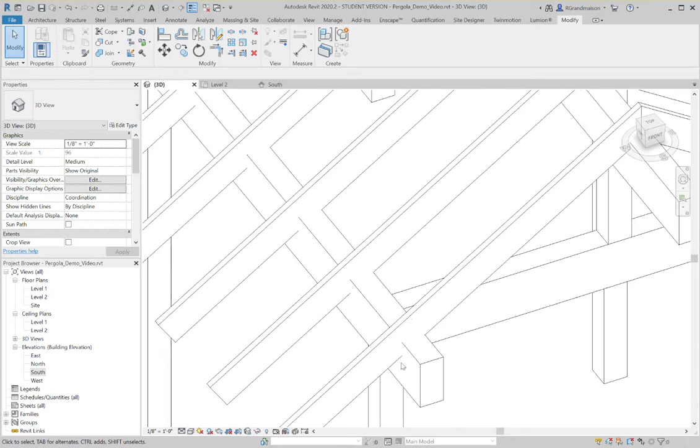So let's take a look first at the bird's mouth that should exist here between this rafter and this beam. The easiest way to accomplish that is to utilize a feature inside of Revit called coping.

Coping is when you cut an unusual shape where beams, in particular steel beams, come together, like an I-beam or a W shape. Often they're sculpted and cut in a very elaborate way, almost to allow the flange on that I-beam to nest into and amongst the webs, or the chords on the top and bottom of the steel beam.

We can use that for wood beams as well, and it's really simple to do. All you have to do is go to your modify panel, and the cope tool is just above the cut tool on the geometry panel.

If you drop this down, you'll also notice there's the ability to remove coping as well. Let me just pause on that.

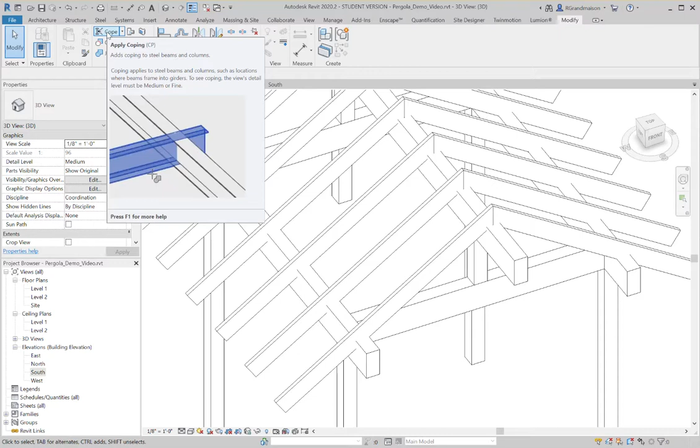Let's see if an image comes up to show you the video for this. Here's a typical situation—you can see what typically happens is you have the ability to take a beam and cope it so it cuts with a certain clearance to the other framing member. Then they could attach welded plates, in the case of steel beams, and bolt or weld them together, whatever it is they have to do.

So in this case, we're going to use the coping tool to cut the bird's mouth in this rafter to this beam, and on this rafter as well to this beam up here.

Really easy to do. All you do is pick the cope tool. You'll notice multiple cut is selected here, so the next thing it's asking me to do is first select the element to be coped—that's the element that's going to be cut.

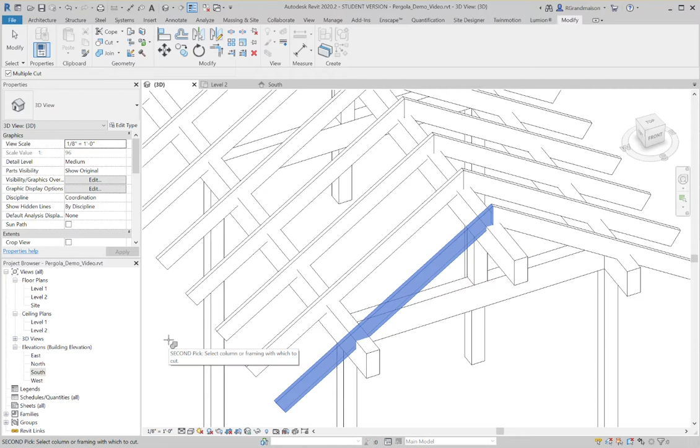I'm going to pick this rafter here, and then it's asking me to select the column or framing with which to cut. I'm going to cut it with this beam here, and now you'll notice it actually cut a bird's mouth out of there.

However, it's the wrong size to really work well for me. Don't worry about that for now—we're going to fix that in a moment.

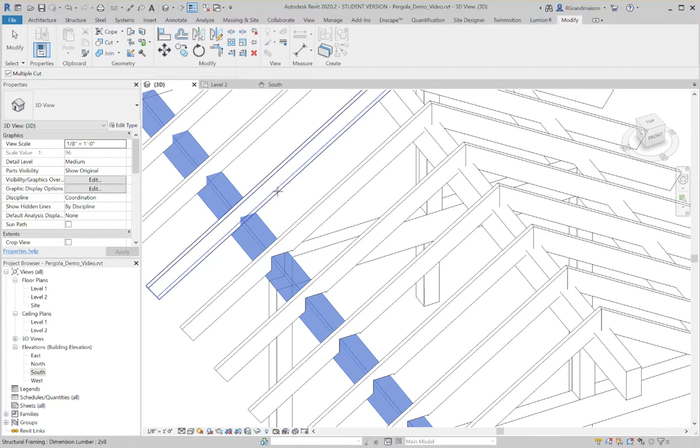So now it's asking me for the next element to be cut. I'm going to pick this one, and this one, and this one, and this one—I'm going to march all the way along here and pick all of these rafters to cut.

All right, that worked out pretty well. I'm going to click out in the middle of nowhere here, and then go back to the tool and pick this beam to cut it.

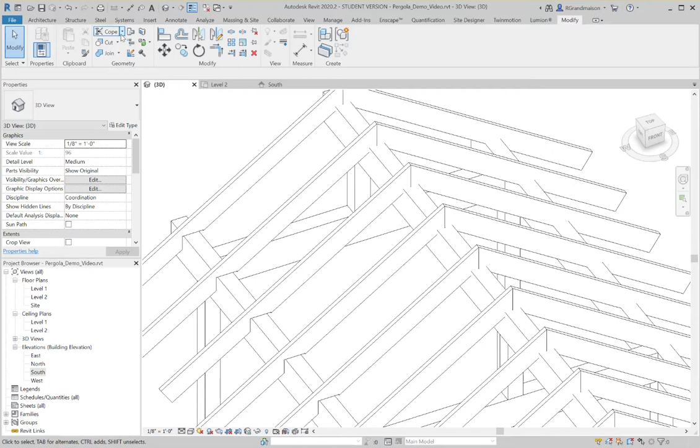Cancel that command and go back to the cope tool. Reselect the cope tool, pick this one, then pick this one to cut it, and then this one, and this one, and this one, and this one, and this one, and this one.

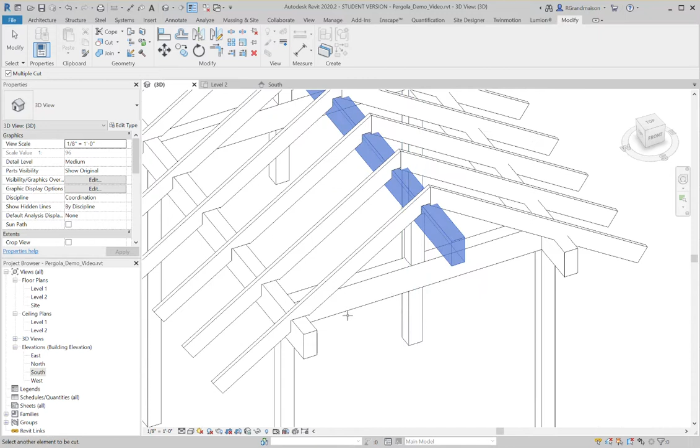So now you can see I have a strange looking bird's mouth at the top and at the bottom of this rafter for the coping.

I could do the same thing on the other side, so let's go ahead and reselect the cope tool. I'll pick the front one here, then pick this one to cope it, and just march along here very quickly picking each one. Doesn't take very long.

Restart the cope tool, pick this front one again, and then this one, and then pick each one of these.

Did I get them all? I missed this one here, and this one here, and this one here—clicking too fast. So now you can see I have them all coped.

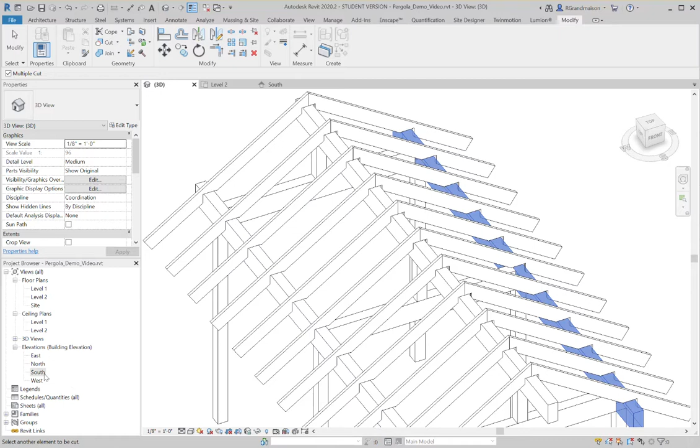However, if we go back to our south elevation, you can clearly see there's a problem here—they're coped too far apart. That's because the coping tool is really designed primarily for steel frame conditions, where you need a certain clearance to the other steel members so they don't bind or twist and cut or break each other in some way.

So in this case, what I need to do is adjust the coping distance. All I have to do is pick all of these rafters.

I'm just going to cross select through the bottom of them here. I'll hold down Control and cross through the bottom of these ones as well. Then if you look inside the properties here, here is the coping distance, and I can adjust them all at the same time just by typing in 0 and clicking Apply.

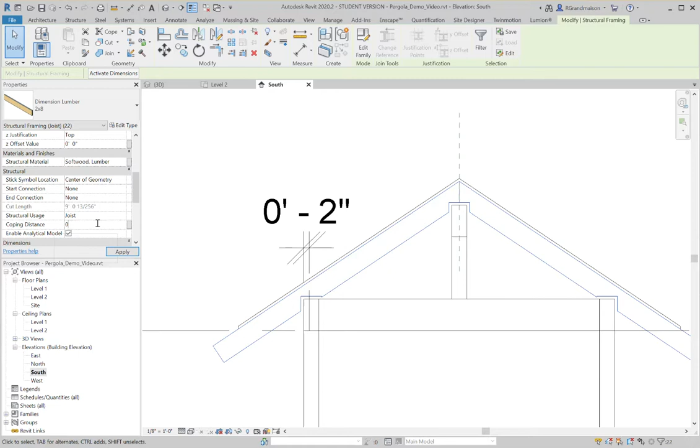Now you can see if I go back to my 3D view, I have a perfect coping bird's mouth cut for each one of those rafters so it shows properly. Really easy to do if you use the coping tool and select them in the right sequence.

Just be aware that each coping operation could only occur with one beam, so I had to restart the coping tool to do the top one. So just be aware that's going to require an additional operation for each one.

Okay, so now let's take a look at putting a decorative cut on these beams. I'm going to do this a couple different ways. I'll use one technique for the cantilevered beams here and the top ridge beam, and then an entirely different approach for these.

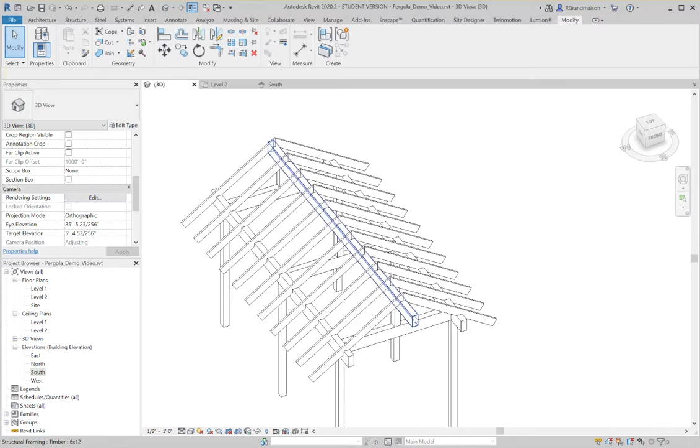Be aware that you could use the secondary approach for all of these. I just want to show you a couple different ways of doing this.

So to cut my beams for these ends here, it would be beneficial if I were to look at it in an orthogonal view. I'm going to take a look at the west or east view, it doesn't matter. I'll work on this beam, so I want to go to the west view here. I'm going to double click in the elevation.

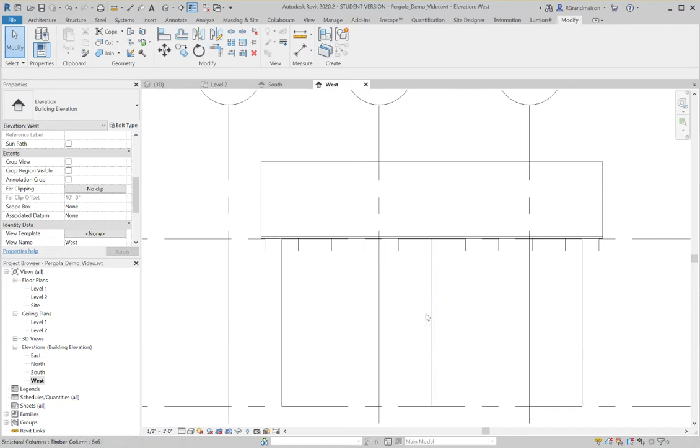Here's my west view. Immediately you can see I've got a problem—everything's in single line or stick diagram drawing, so I'm going to change this to a fine level of detail. Now I can see my beam here, that's the one I want to create a decorative cut on.

This decorative cut can be of many different shapes or forms. You can even use reference planes to cut with as well. So if I drew a diagonal reference plane here, I could actually cut it with that.

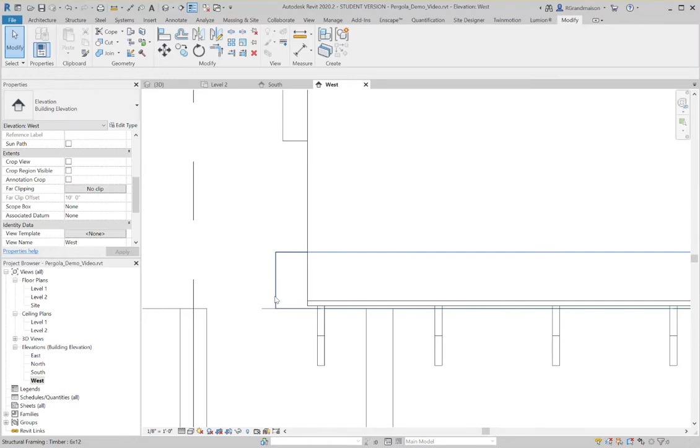But in this case, what I'm going to do is use an opening. You can do it from the Structure tab or the Architecture tab, doesn't matter which one, and you'll notice in the opening tools there's an opening by face. It intentionally shows a little steel beam here.

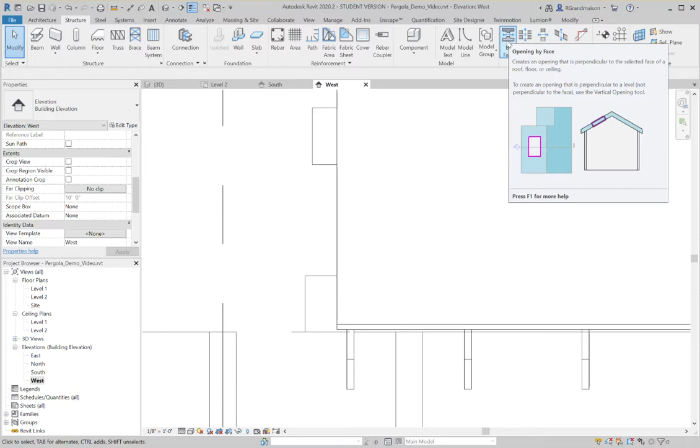It's because this tool can be used when you want to put a hole in a beam, in the middle of a beam, to put piping through or ductwork or something like that. Consult with your engineer—never cut holes in beams without proper guidance and making certain you're not invalidating the integrity of the beam.

So I'm going to select by face here. I'm going to move to the edge of this beam, and make certain I can see a big rectangular plane here. What this is doing is picking the plane that the middle of the beam is drawn in. So I'm going to click on that.

Now I'm in my sketch mode, so I can go ahead and sketch something that I want to remove from this. You have to obey the rules of sketch mode—you have to make certain you don't have lines that overlap or gap or anything like that.

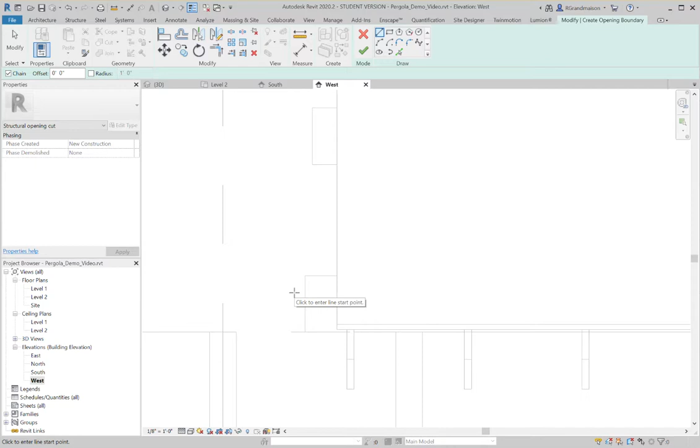I'm just going to go ahead and pick the line tools here. You can dimension this if you wanted to as you're working, but I'm not going to bother doing that. I'm just going to sketch something freehand here.

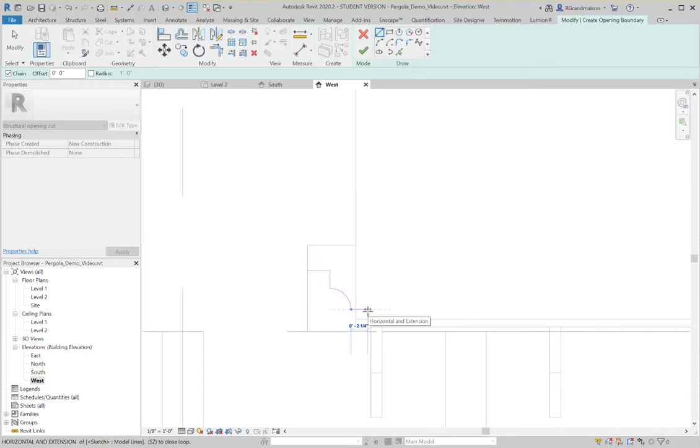And let's do that, and I'll do this and go back to my line tool. And I'll do this... back to my line tool. Here, maybe 2 3/4 down this way, and then I'm just simply bringing it back around the other way. And I'm going to trim this out like this.

Now what I've done here is I've created a closed area. It must be closed, but it can extend outside the beam. You could, of course, just use the edge of the beam if you wanted to pick line for those—doesn't really matter, just so long as it extends outside in some way. It must be closed too, so don't forget to add these two elements, and I like to extend it beyond there.

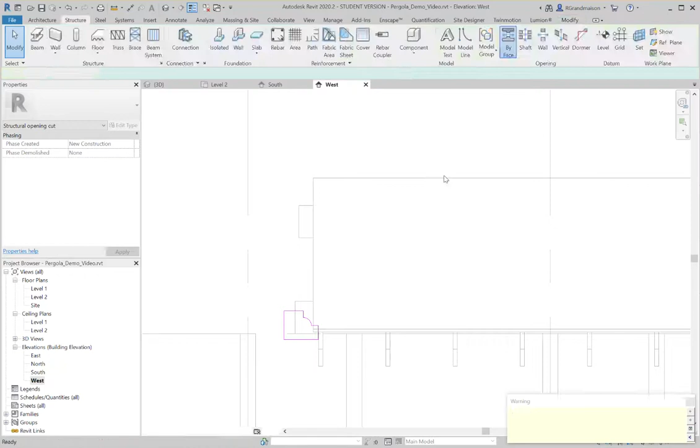Then what I can do is just click check, and it will give you an alert. Don't worry about this warning you see down here—it's telling you that it partially cuts its host. That's not a problem.

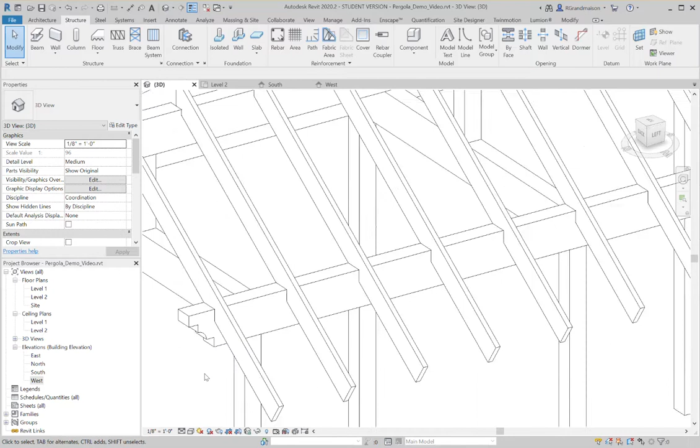And then if I click outside here to make this warning go away, you can see I've just cut the end of this beam. So if I go to my 3D view, you can see, sure enough, if I orbit around to the other side so you can see it, that beam now has a decorative cut in it at the end. Okay, let's go back to the west view.

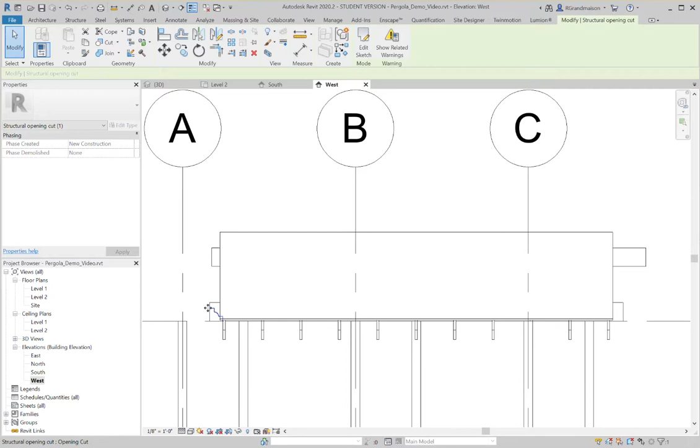Now that I have this decorative cut here, I might want to put it on this end of the beam. And that's not hard to do. All I have to do technically is take this cut and mirror it. So since this building is symmetrical, I know that this column here is the center of my building. I can actually select this opening, that's a separate object basically, use my pick axis mirror command tool, find the middle of this post, click there.

Again, I'll get this message, and now you can see, if we look at this from a three-dimensional standpoint, you can see that beam is now cut on both sides.

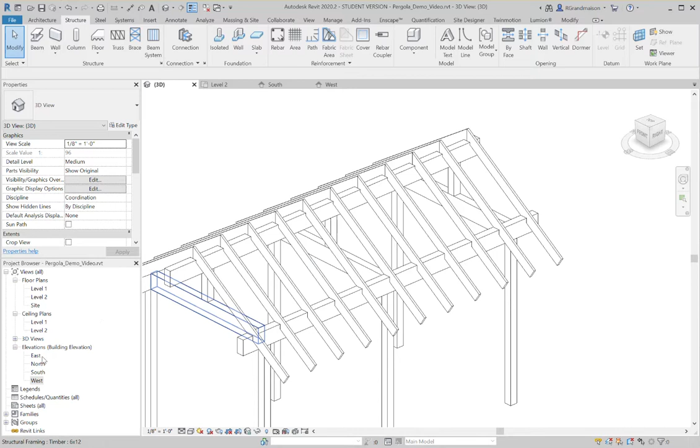Pretty easy to do. I'll do it on the east side, only this time I'm going to cheat a little bit. I'm going to go to the east side. Again, I need to go into fine level of detail view here. And now what I'm going to do is cheat a little bit. I'm going to actually borrow or trace, if you want to think of it that way, the lines from the other cuts onto this one.

So I'm going to go over to my display modes, and I'm going to change this from hidden line into wireframe. Now I can see the lines back here very easily. So I'm going to again do the same thing, opening by face, make certain I pick this face, not this one, but this one. So make sure you get that big green rectangle.

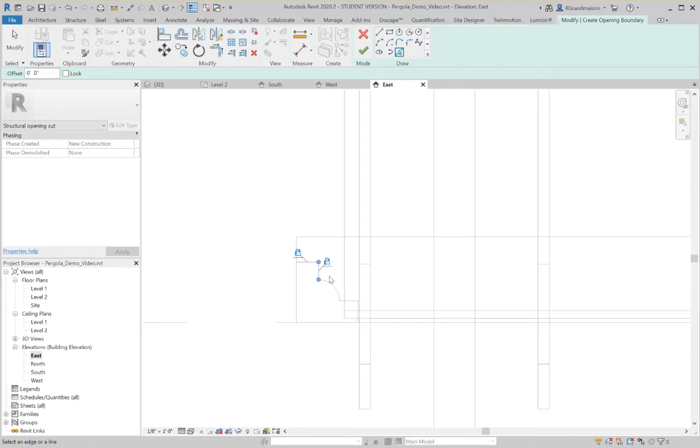And then I'm going to say pick line, and now I can pick these lines that are way in the background on the other beam. In fact, I could even lock them if I wanted to. That way, if I went in there and edited that sketch on that opening, on that one, this one would automatically readjust to match it as well.

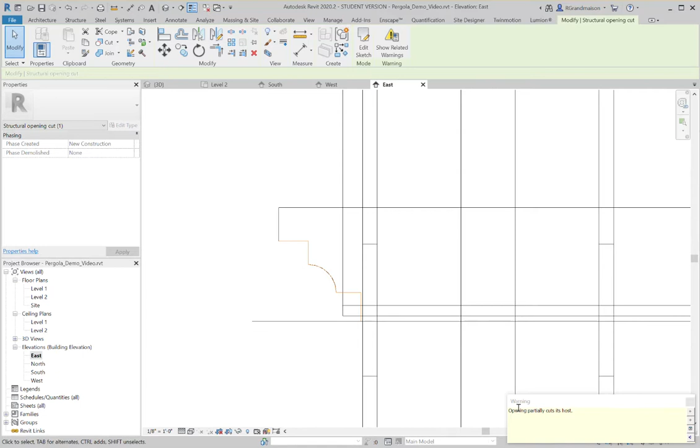And then I'll just draw a line out here, and then I'll trim those corners up like that, and click check. Again, don't worry about the warning. Anytime you get a warning in yellow like this, it says warning, you don't have to click the close button here. You can just click anywhere in a blank area and that warning will go away. That's how unimportant they are.

I'm going to select this opening cut again, and I'm going to use my mirror by axis tool. Pick the center of this one since I know it's the center of my building, and I'll get this warning again. Don't worry about that. And you can see now that that beam has been cut at that end as well.

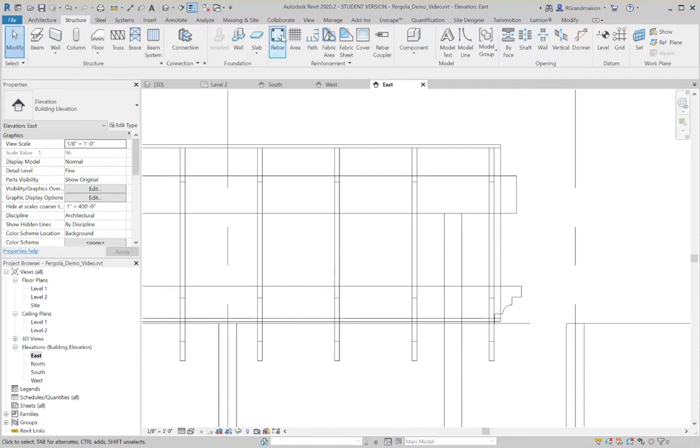So now you can see if I go here, you can clearly see that my beams have all been cut in both directions like that, and everything looks pretty good. Now I can cut this one the same way. Let's go back to the east elevation maybe.

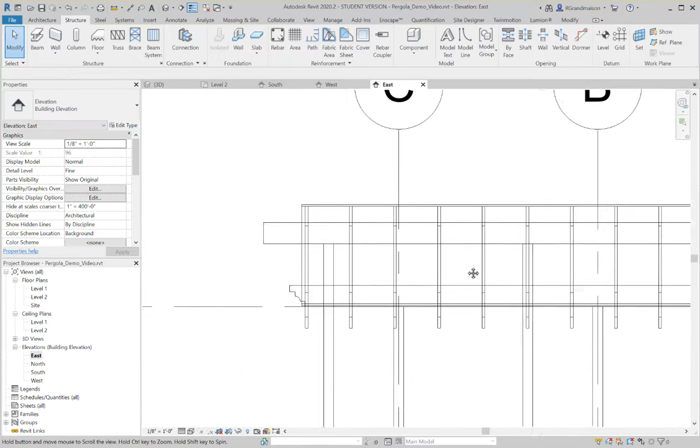And here's where I might want to think about how long these beams are. I might want to extend it out to match that one maybe. So watch for your reference lines. If you want to do that way, that would be fine. I'm going to drag this in so I know it lines up with that beam nicely. And here's a situation where I want this one to come up here, but it's not in line with it, but that's okay. I can still do this pretty easily.

What I'm going to do is I'm going to go ahead and use the same technique by face, pick this beam. I'm going to use the same technique. I'm going to use pick line. I'm just going to pick this one, this one, this one. I'm not locking it though.

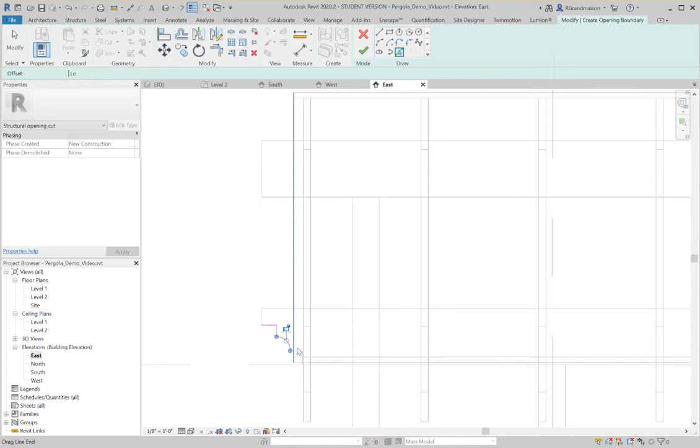And then this one. And again, I will do the same thing where I have a line that continues across here. Come on, Revit, what'd you do? There we go.

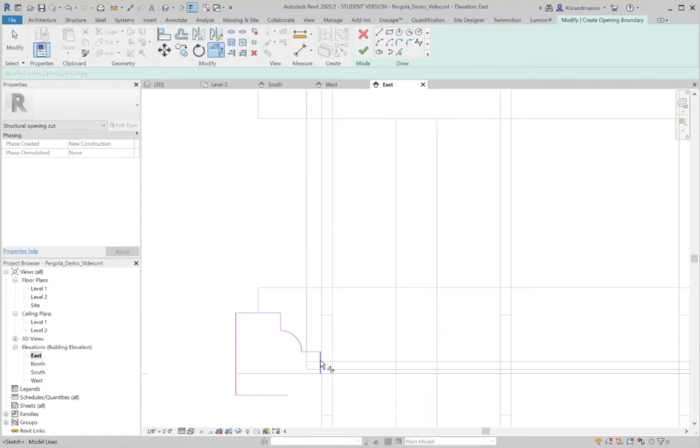And trim this one to this one, this one to this one. And now what I'm going to do is just cheat a little bit. I'm going to grab all of these and I'm going to move them from this endpoint on the beam here up to this endpoint here. Technically, I'm in that sketching plane. Even though I was borrowing the lines from the other one, I'm still in the beam plane itself that I was sketching in. So I know that's correct, so I can click check.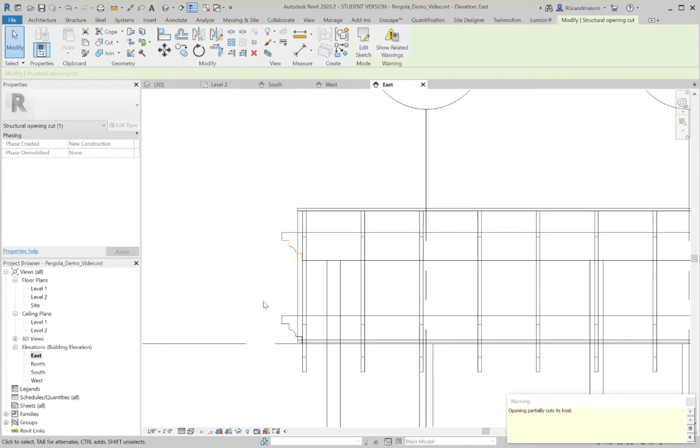Again, you'll get the warning. Don't worry about it. Pick this into the beam.

Mirror once again, pick the center of your post or the center of this rafter. It's laid out the same way. I could tab select if I wanted to and grab the center of that beam right there, or rafter. It would work just as well.

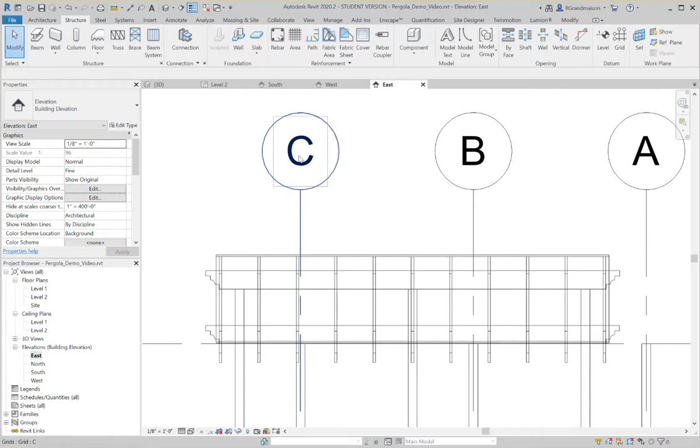Now you can see my beam has the same decorative cut at the top here. So that takes care of the decorative cuts on the beams, and it also takes care of the bird's mouths on the object as well. So if we look at this, it's starting to look pretty reasonably good for a building of some sort, or a pergola. So what if we want to put decorative cuts on here?

That is a lot of sketching, isn't it? So here's a situation where we're going to venture outside of our project file for just a moment. And I'll tell you that when you're working this way, sometimes it becomes important for you to think of more productive ways of working.

So what I'm about to do is open up this rafter in what's called the family editor. And what that's going to allow me to do is to define the parameters that drive this particular family. In future assignments, we'll be looking at the family editor, but for now, it's just going to be a little baby step venture into it.

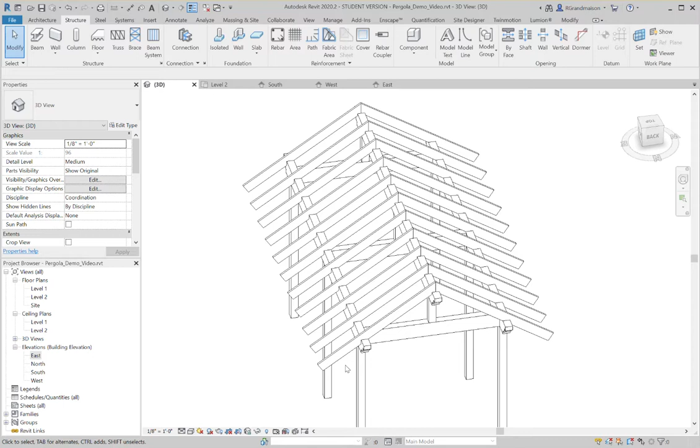So I'm going to select this rafter here, and I'm going to say Edit Family. Now, this is going to open up a new environment for us here. This is specifically opening up the family editor, which is an editor that allows you to create families that are loadable into your Revit environment, your Revit projects.

You'll notice these tools up here should look familiar to you: the standard creation tools, extrusion, blend, revolve, sweep, swept blend, and their void counterparts as well. This object here is actually a sweep, and it's basically using some dimensional information to drive the shape of this thing.

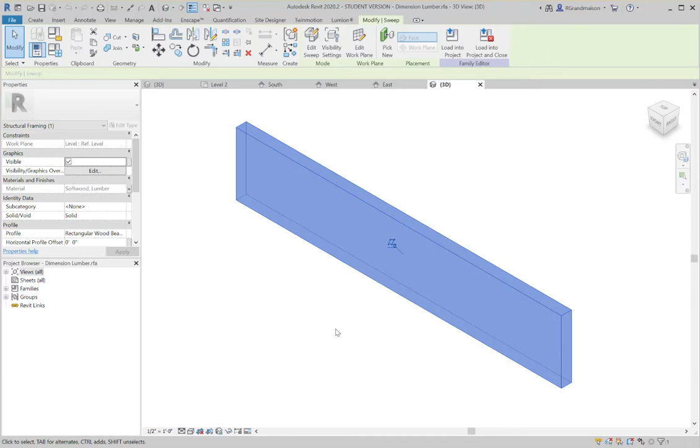These are the types. Whenever you create types by editing the type and duplicating it and creating a new type for something, you're actually making types. This tells me what types are inside of this particular family right now. Well, I actually want to use a 2x8 rafter, so I'm going to say 2x8.

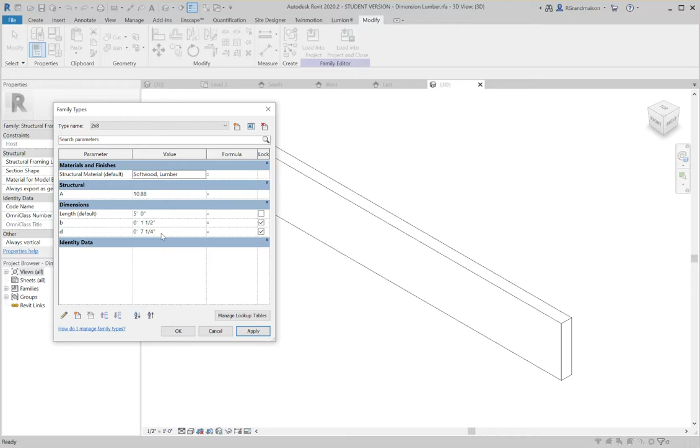Click Apply. So you'll notice my rafter changed its size a little bit here. I'm going to click OK, and you can see here the dimensional parameters for it, the thickness of the board and then the height of the board. I'm going to click OK.

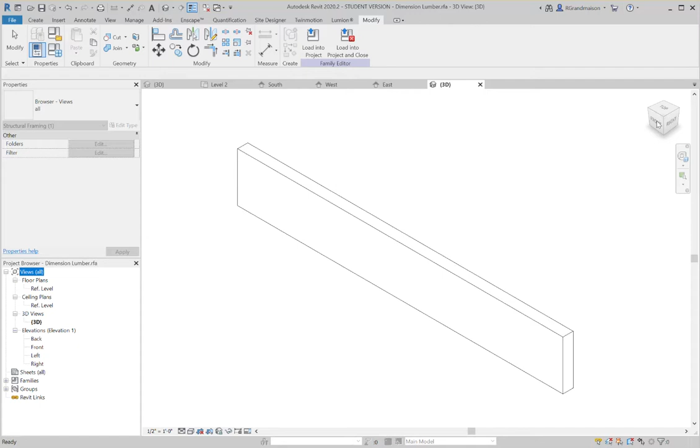And now here in the project browser, you can see your directions for the views. So if I open up the views, you can see that there are floor plan views, ceiling plan views, 3D views, and elevations. I actually want to look at this thing from an elevation, and I can tell by looking at my view cube here, I want to look at it from the front. So I'm going to double click the front view.

Here is that object. These are the reference planes that determine the location of things like the connection point and the extensions on the beam when you create them. But what I really want to do in this case is I want to sketch a void on this end and on this end.

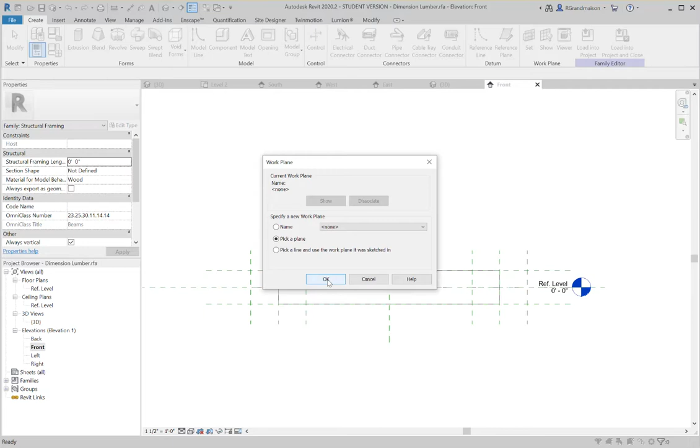So I'm going to go to my Create tool, select Void Extrusions, and I'm going to pick a plane by clicking OK. I'm going to move over here and tab select until I can see I've selected the front face of this object. And now I'm going to go ahead and sketch.

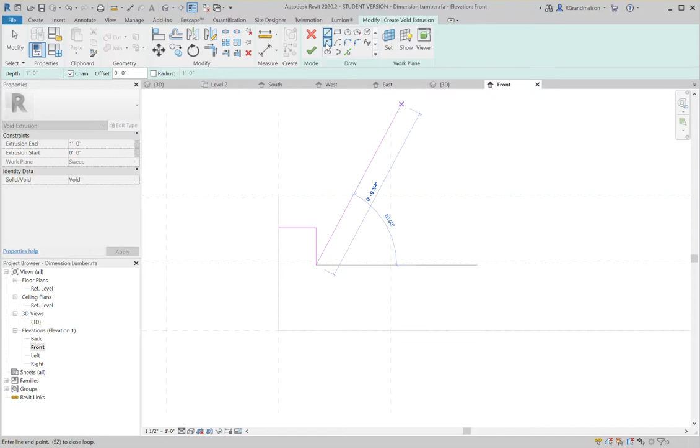So I want my rafter tail to look a little bit like this maybe. Let's zoom in here, let's make that 2 inches by 2 inches. I will grab this again, 45-degree line. I like that. Back to my line tool, back this way, and then down like this, and then over to here, and then up to here. And then I'll trim this again like that.

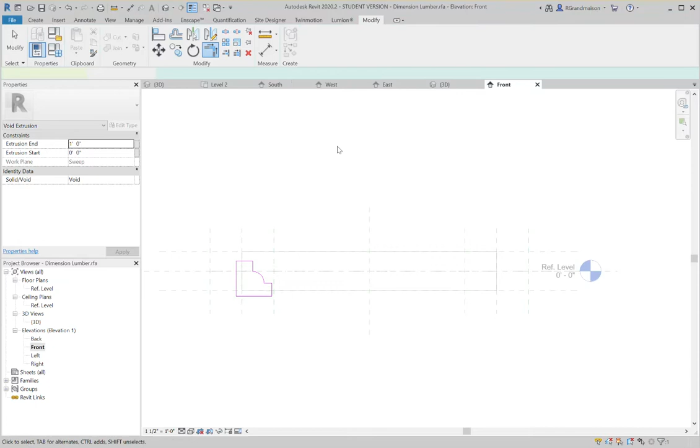And I'm going to click check to see what it looks like. There's my void. I could select the void here, and I can actually mirror it with this tool here. I'll go ahead and use the pick axis tool and grab it like that. So now you can see I've got this decorative tail on my rafters.

Now, notice what I'm working on here. I'm actually working on the framing family, dimension lumber. This becomes a problem if I load this back into my project. If I were to load this into my project, it would replace every single 2x8 occurrence with this new decorative tail cut. So I don't want to do that. I want to be very careful about overriding and stepping on the toes of families that already live in my project.

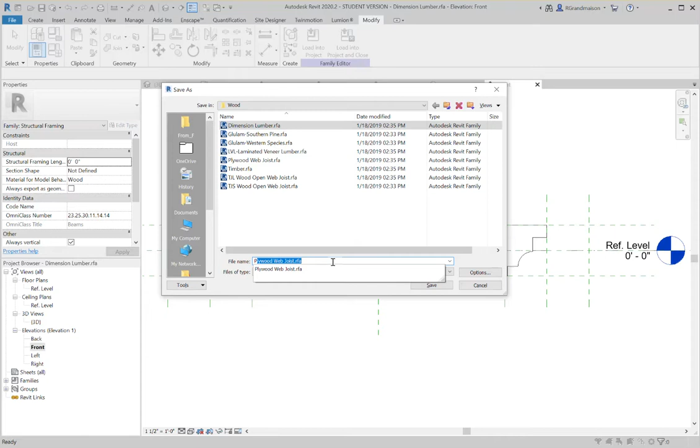So what I'm going to do is save this as a new type of family. I'm going to go to File, Save As, Family. I could put it in the Revit folder, but that's not the best idea—I'd actually probably put it in a project folder, but I'm just going to leave it here for expedition purposes. I'm going to call it Pergola Rafters.

Now I can go ahead and load this into my project, so I'm going to say Load and Close. I don't want to keep this open anymore, so I'm just going to load and close this file.

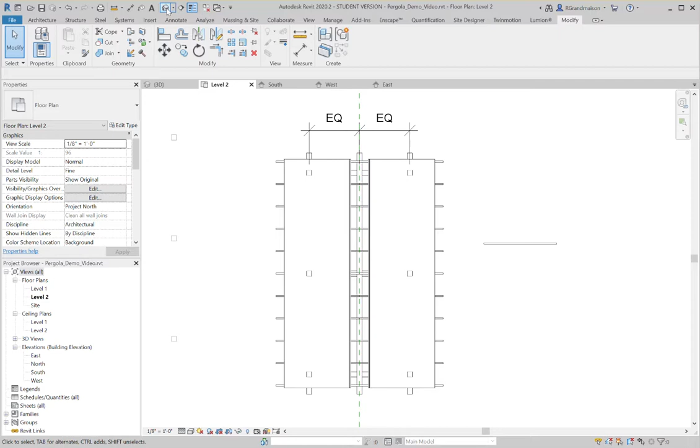It's now loaded into my project, and you'll notice in the preview you can see the decorative cuts on here. If I actually draw a rafter and look at it in 3D view, you can clearly see that this rafter, even if I make it longer, now has decorative cuts on the end.

Oops, that's the wrong size—I should have done 2x8 here. There we go, 2x8. Oops, I want the Pergola 2x8. Where'd you go? There you are. Okay, so that's what I expect to see.

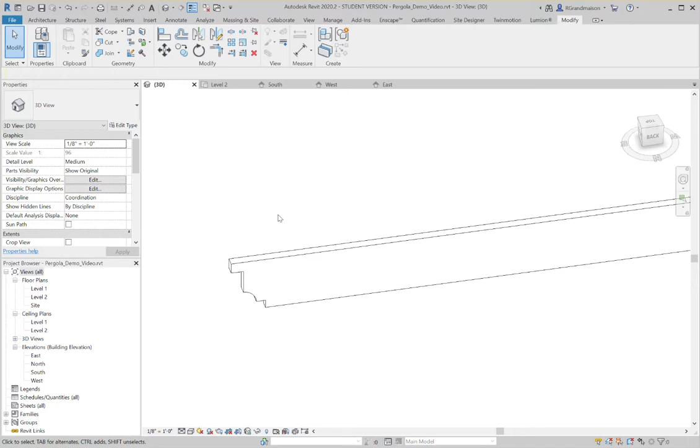Notice that when I change this to a 2x10, these distances change, because I designed that particular cutout to work only with the 2x8, and I didn't constrain it with dimensions or parameters. You could do that with your sketches when you make voids and things—you can constrain them with parameters. So I'm going to make certain that that is a 2x8.

Now I want to replace all of these with these to put decorative end cuts on all of them very quickly. Keep in mind, when I made these extend up here higher, there's actually a decorative end cut up here, but the reference plane we used to cut these removed that decorative tail at that end.

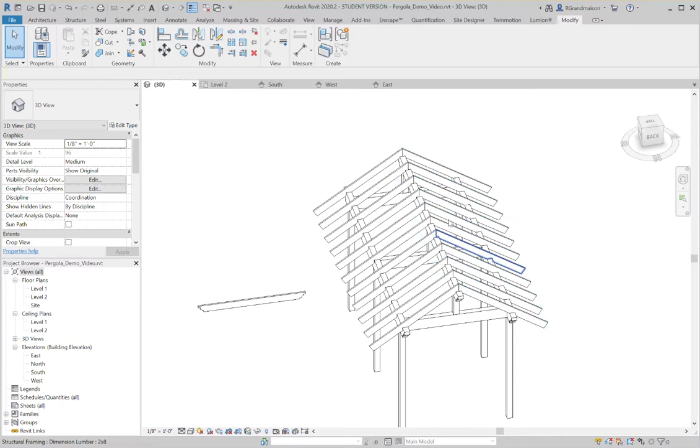So you don't want to do it for each one—you actually want to go into the beam system. I'm going to select my beam system here, and you can see the beam type is dimension lumber. I'm going to drop this down and tell it to use my 2x8 pergola rafter. Now you can see, lo and behold, I have a decorative end cut on every single one of those.

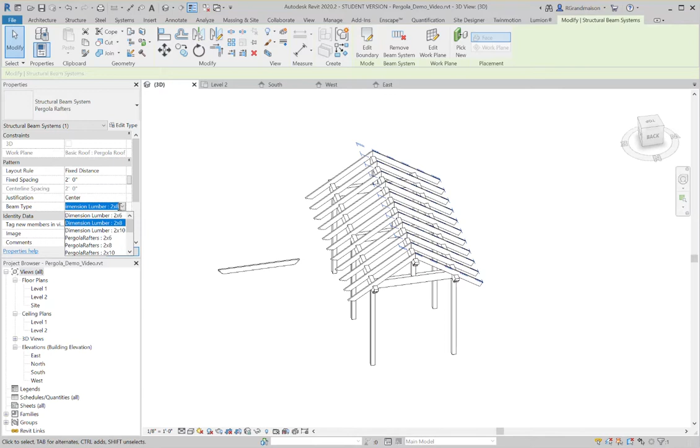I'll do the same thing for this one and change it to pergola rafters 2x8—again, a decorative end cut on every single one. That's probably a better way of working, I think. We could have done the same thing on these too—made a new beam family called pergola beams or decorative end cut beams, and that would have taken care of it.

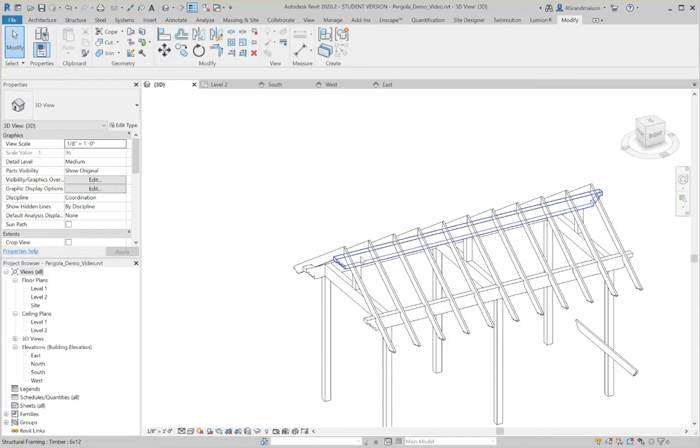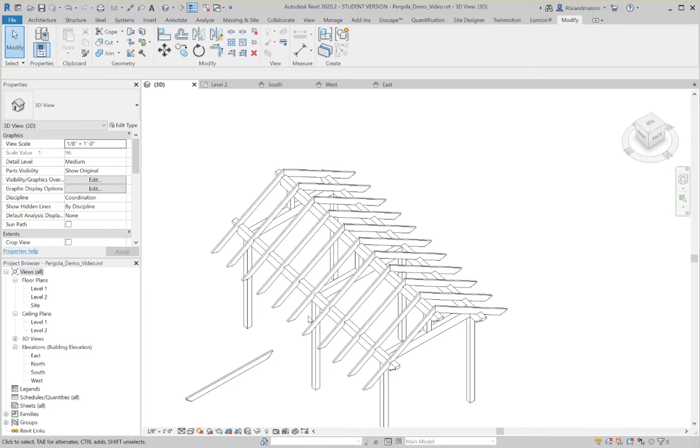Now there are some other things you probably want to do here as well. You probably want to put blocking between each one of these—in the real world you'd have blocking between the rafters. You can take a piece of wood, a blocking element, and bevel the top of it easily inside Revit using a reference plane. If you put a piece of lumber from the inside face of these two rafters, you could use a reference plane or another element to cut it.

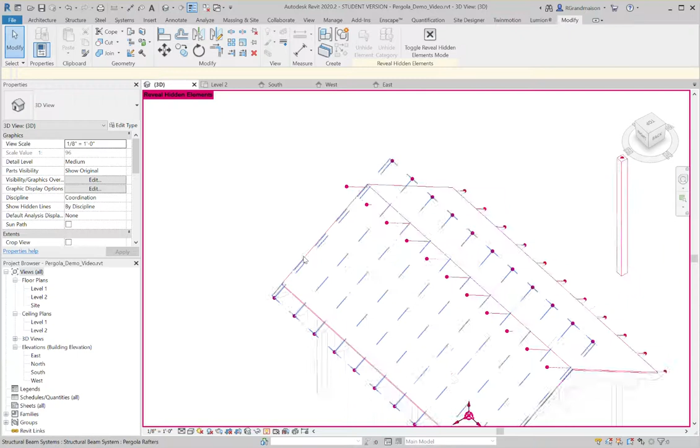In this case, I'm not going to do that. I think if I turn on my roof, that pretty much takes care of everything I wanted to show you for creating this particular project. Let me go ahead and unhide this element in view, back to regular visibility, and now you can see there is the assignment.

The only thing really missing to make it complete would be some kind of foundation system or floor, if you wanted to put one in. And of course I've given you the option of dressing it up with entourage, people, and things as well. We'll be utilizing this particular file in a future project, so it would be beneficial to finish this one so you can use it later—we'll be linking it into a site plan project in the near future.